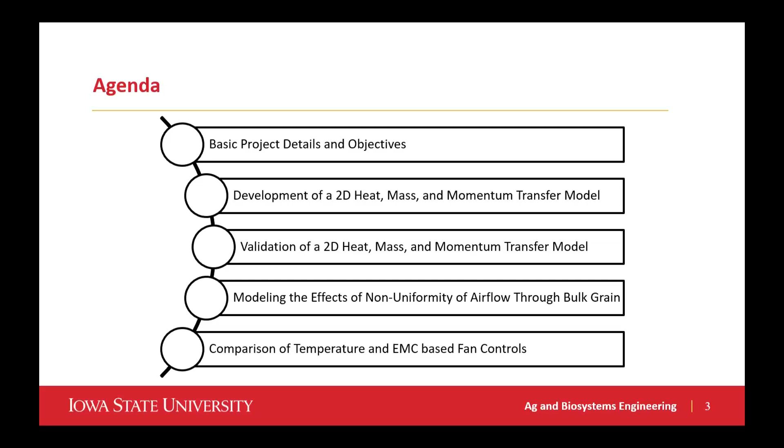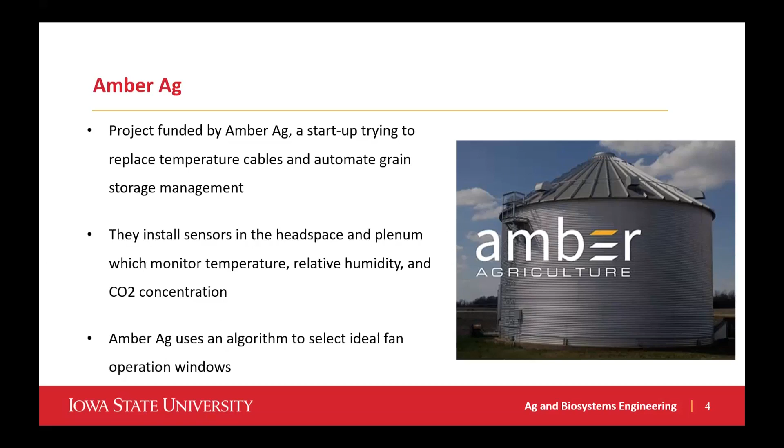My project is funded primarily by a company called Amber Ag. Amber Ag is a startup trying to replace temperature cables and automate grain storage management. Instead of temperature cables, they have a more simplified system with a sensor in the headspace and in the plenum. These sensors monitor the temperature, relative humidity, and carbon dioxide in those two spaces. They also have a fan controller as part of their system so they can look at weather patterns and predict the best aeration windows, allowing more automation and control over fan and aeration practices.

The objectives I had for helping their system out with my work were, first, to develop and validate a grain storage ecosystem model. Since they don't have cables directly sensing the grain, that's where the model comes in to predictively monitor the temperature and relative humidity. I also wanted to begin integrating the model into the Amber Ag system for predictive grain monitoring and automatic grain aeration management, helping improve the way they select windows and adding modeling to their technology repertoire. Lastly, I evaluated the effects of non-uniformity of grain mass on the non-uniformity of aeration, cooling, and conditioning.

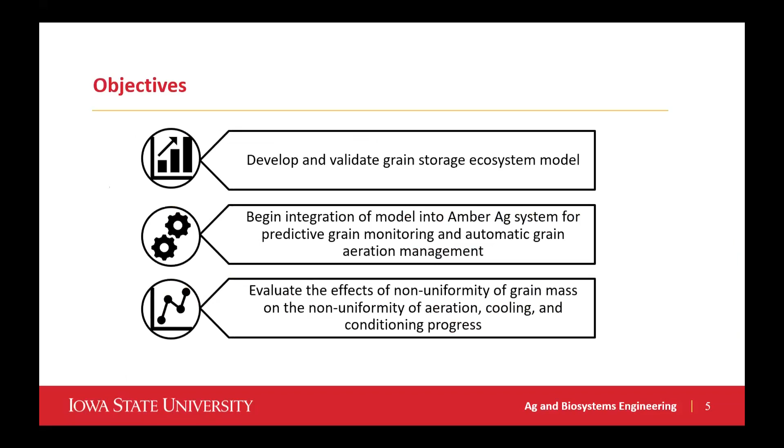Without temperature cables, they don't have direct sensing, so we need a model that allows us to predict the grain temperature based on recorded weather data and all of the bin parameters. We can run the model with that data and get an estimate of the grain temperature distribution and the grain moisture content distribution. The other big function temperature cables serve is detecting hotspots caused by biological activity that can cause grain deterioration. This activity causes an increase in heat, detected by the cables, and also produces carbon dioxide. So the Amber Ag system, without directly sensing hotspots in temperature, directly senses the carbon dioxide increase. The model will then be used in finding aeration windows and further study of grain management practices.

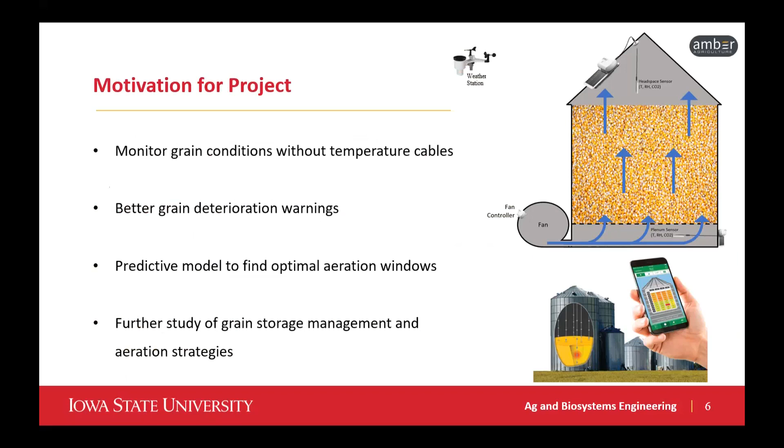Next, I'll talk about the development of the model. Without going into too much detail on the equations, in the grain mass we account for heat, mass, and momentum transfer. It's important to account for heat and moisture transfer so we know the temperature and moisture content of the grain, and the momentum transfer accounts for natural convection. The Khankari equations were used here for two main reasons: the temperature equation accounts for latent heat, which is important so it's coupled with the moisture equation, and likewise the moisture equation is coupled with the temperature equation, with parameters where diffusivity is based off derivatives of the EMC curve. So it takes the EMC curve into account when accounting for the equilibrium between the air and the grain.

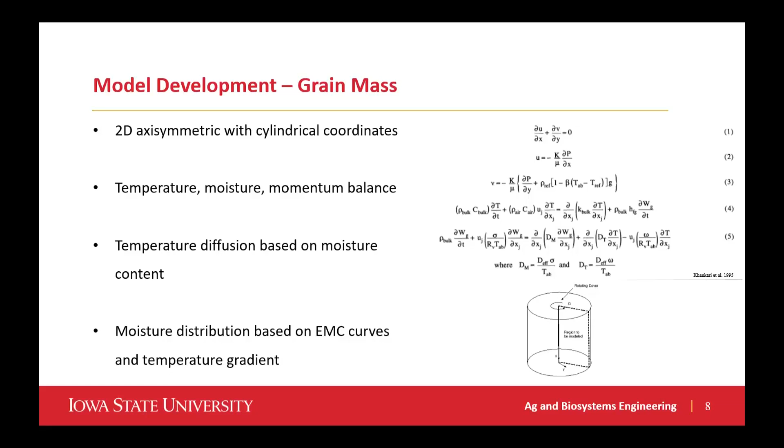The boundary conditions are prescribed as systems of ordinary differential equations, essentially energy and mass balances on these boundary conditions, which account for heat loss to the grain, heat absorbed from solar radiation, and heat gained or lost due to forced convection from the wind. So all of these things are accounted for in the boundary conditions.

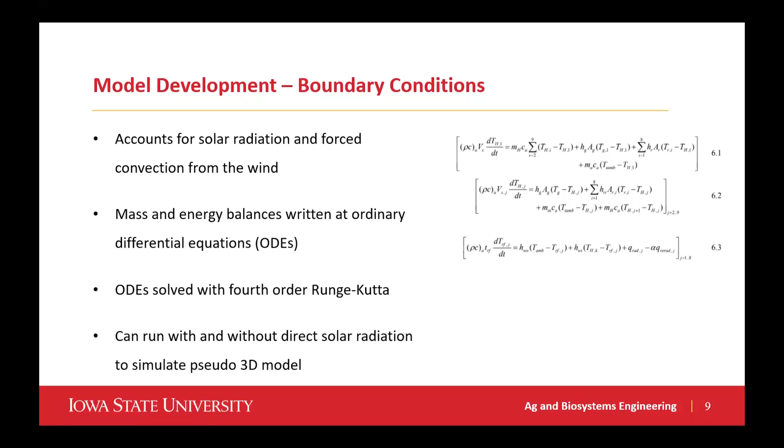Additionally, the way we account for solar radiation allows us to mimic the effects of a north versus south side, where you would receive or not receive direct solar radiation. So while being a 2D model, this allows us to have some investigation into those 3D effects.

The aeration model was based off of an existing model in Python, based on previous PHAST models which have been well documented and well used. It's based on the Thompson equilibrium model, a widely used model that has been used and validated many times before.

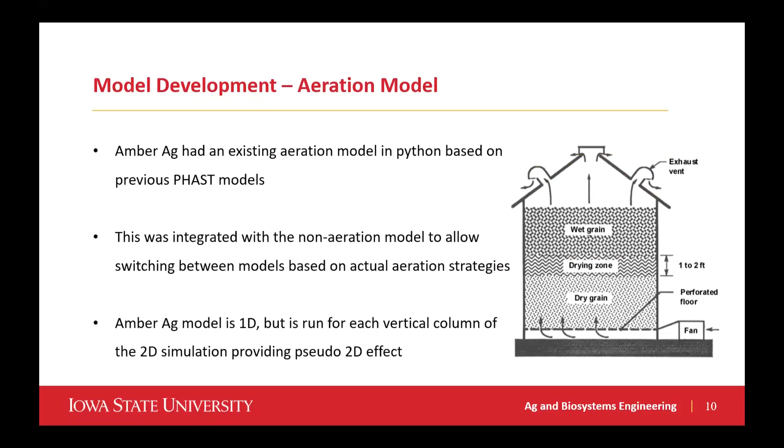The numerical methods of this model are very different from the model most recently done by a previous grad student of Dr. Myers, Dr. John Lawrence. His model was very complicated and took a lot of time to run. Some of these simulations took several hours to run, and we wanted to narrow that down to running in a few minutes. That's one of the main reasons it's two-dimensional.

It uses an explicit method, with larger mesh sizes. Additionally, it was being done in Python, which is just inherently less efficient than Fortran, which the previous model was coded in.

But because we have simplified the methods and used more efficient computational methods, it means it's a much more user-friendly model with much easier access. So it's more accessible to people, and more people can make use of this model because it runs more quickly and doesn't take as much background coding to utilize.

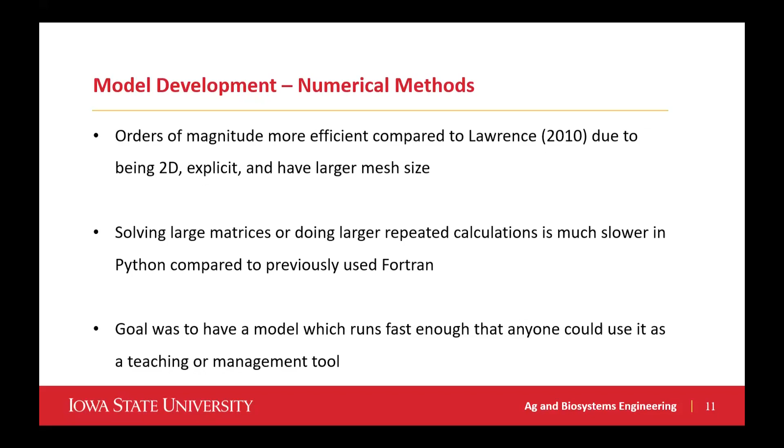So after the model was developed, the next big step is, of course, to validate the model so that we can trust the results.

Model validation for the headspace and plenum was done with recorded data from the Amber Ag sensors. Like I mentioned, the Amber Ag sensors are installed into the headspace and plenum of bins. These bins were at the ISU research farm, and we were able to compare our model data with these recorded data points from Amber Ag.

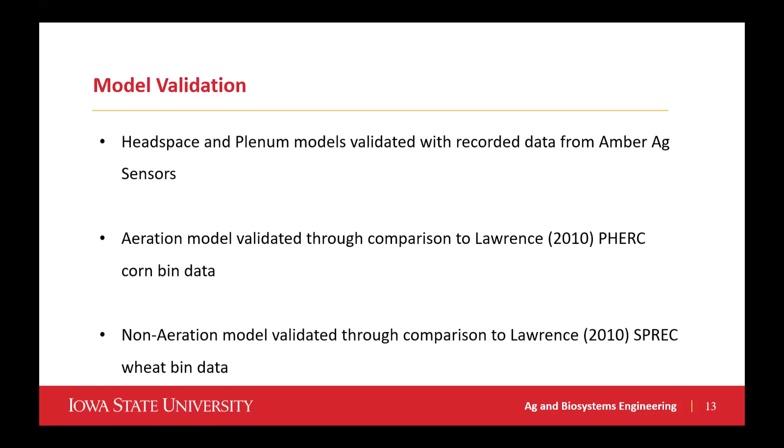The aeration model was validated through comparison to the Lawrence dissertation, and the non-aeration model was also validated through comparison to the Lawrence dissertation.

This is the graph for the headspace model. As you can see, we have pretty good agreement following the daily trends of heating and cooling throughout the day. There are a few spots, especially in the early portion, where we're over-predicting the temperature right at the peak, due to over-prediction of the effects of solar radiation and maybe under-prediction of the effects of forced convection, which would bring that down.

But every nighttime temperature is very accurate when there's less solar radiation. So when you average everything out, the standard error ends up at 6.4 degrees, but the rolling average error is only 0.72. These daytime highs really are exaggerating why this standard error is so high, but the rolling error, the average error over the whole period, is pretty good. That's what's most important for the diffusion of heat into the grain mass. Daily temperature spikes are not going to have a huge impact on the overall accuracy as that diffuses in, which is why I've also included the average error.

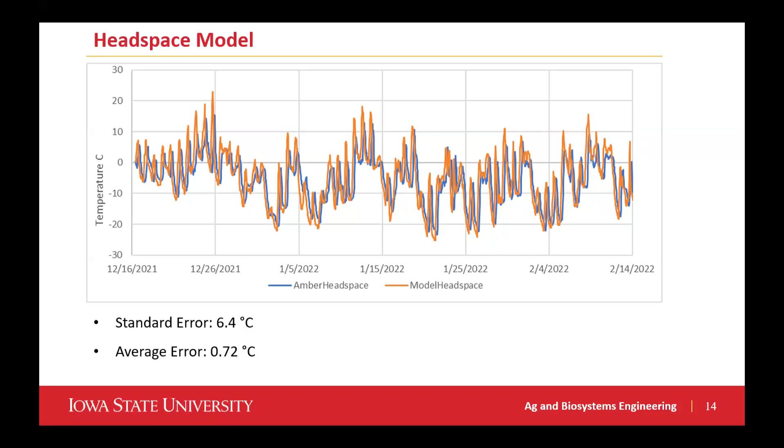The same is true for the plenum model, where we have some under-predictions at the start of the run, causing a standard error of 6.7, but an average error of negative 1.9 degrees.

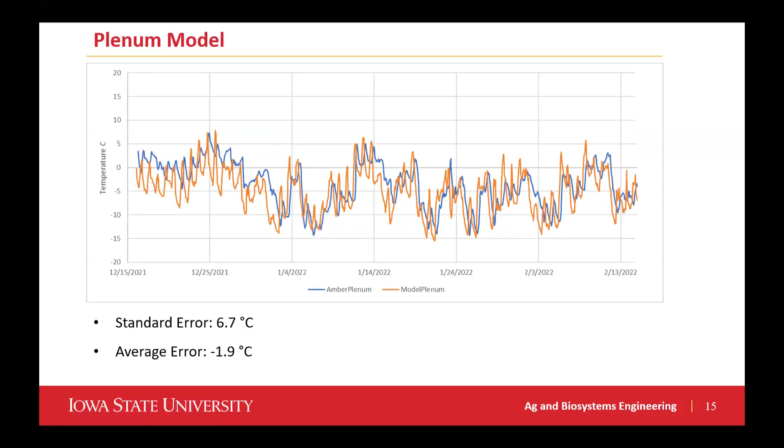Next, we look at the aeration model. Here we have our model overlaid over the results from the Lawrence dissertation.

Our model is this orange line, the current model. The blue line is the Lawrence model, and the red line is the recorded data from the Lawrence dissertation. This looks at the center cable for a bin, and we have the bottom node, the middle node, and the top node of that cable.

At the bottom node, we have around 0 to 2 degrees Celsius error throughout the entire run. The main areas where it deviates are in the afternoon of the 11th and the 13th. I thought it was interesting that's also where the Lawrence data overpredicts by more, but at the same time, I thought that could point toward a difference in the recorded weather data and the actual local data experienced, because we can only be as accurate as our weather file, which is usually recorded from a nearby weather station.

But overall, the aeration front is well tracked, and we capture the movement of cooling and then rewarming. This pattern is generally pretty well captured.

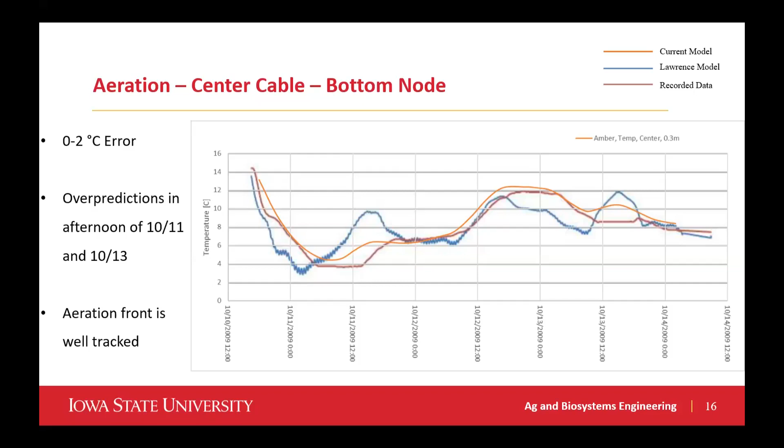Lastly, in the top node, we see that the error over-predicting at the front has increased. The angle is less steep and the movement is just delayed. It's lagging behind, or a little over dampened. This could point to differences in the actual airflow rate and the calculated airflow rate based on the bin dimensions and fan specs.

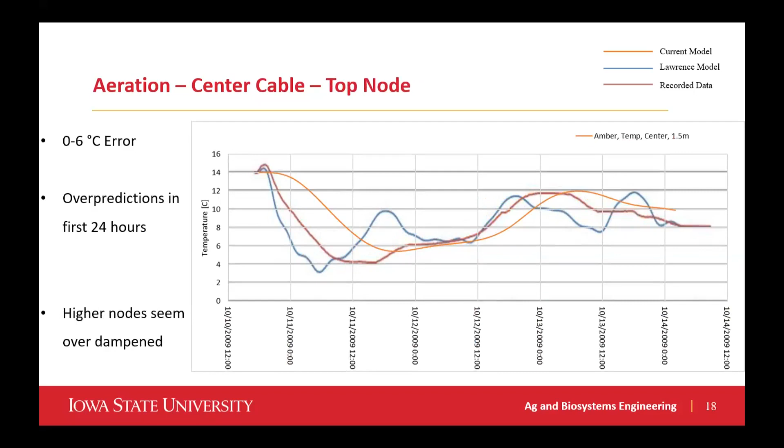One thing that's important here is that we see this wave, this dampening effect. When we look from the bottom node to the middle node to the top node, you can see the waves sort of stretch out, delaying those effects. That's something we see in aeration in both the recorded data and in our model.

So looking at aeration, the center cable shows pretty good agreement between model and recorded data. We can see the wave dampening shape and behavior of the model throughout this cable and what we've looked at. And we know that airflow is definitely a key parameter in modeling aeration.

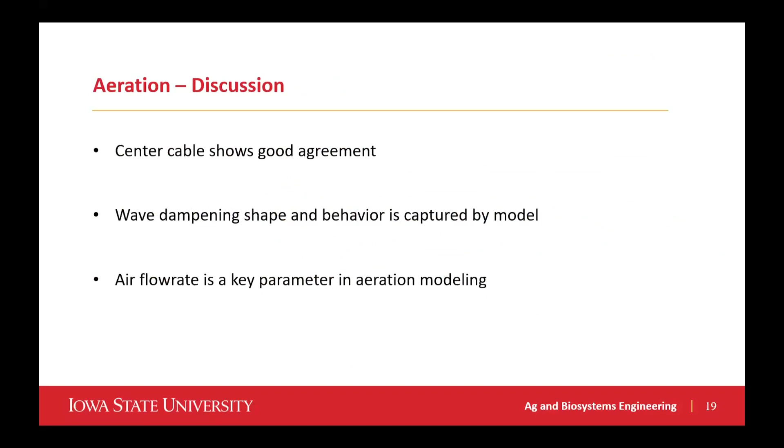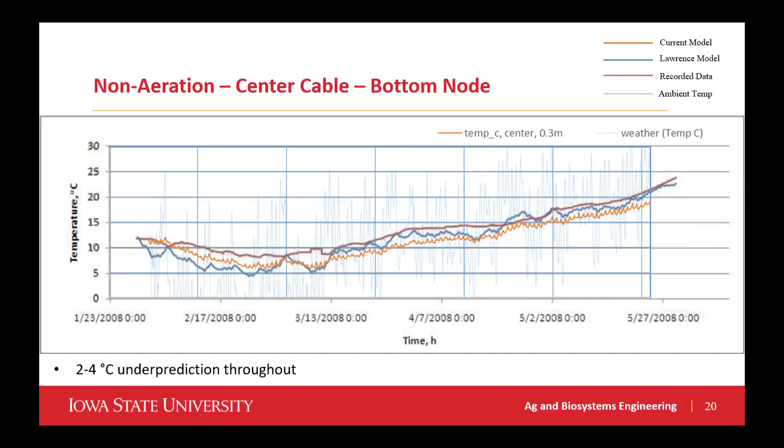Here in the bottom node, we have a 2 to 4 degrees Celsius prediction error pretty much throughout the entirety of the run. Obviously, we start at the correct conditions because that's the input, and then it's generally under-predicting by about 2 to 4 degrees throughout the duration of the run.

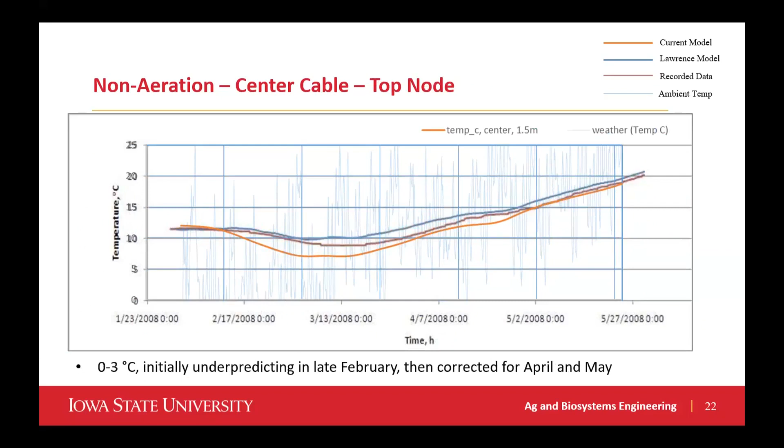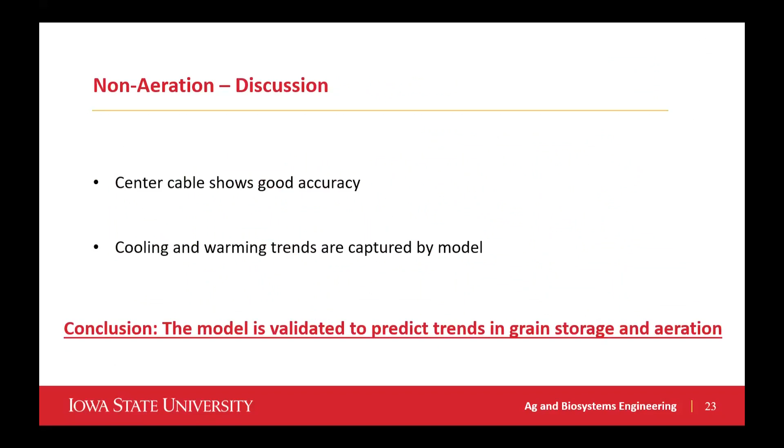Overall, for the non-aeration case, the cable shows pretty good accuracy, and we're capturing those cooling and warming trends that would be expected over a storage period during these kinds of conditions.

The next thing I looked at was the effects of non-uniform airflow through bulk grain mass. In addition to working with Amber Ag, I also worked with another company called Grain Weevil, and they developed the Grain Weevil robot. This robot allows you to avoid entering dangerous grain bins. It can break up crusting or level grain without a human actually entering the bin, which increases the safety factor.

My work was focused on proving the potential effects of the Grain Weevil. In having even airflow, there are two main problems that we tackle.

When grain is just poured into the grain bin, we have a peaked grain mass based on the angle of repose, and there can be a concentration of fine matter, which decreases the porosity and increases the resistance to airflow. Both of these things slow down aeration progress in the center of the bin, which is inefficient and leads to excess run hours.

What the grain weevil robot claims to do is you could add it after filling a bin to spread out the grain mass. This wouldn't affect the concentration of fines, but it would remove the peak without a person having to enter the bin. It could also be added with the grain mass to spread out every load added to a grain bin. If it can keep up with the rate that the load is being added, you could spread out the fines and also end with a level surface.

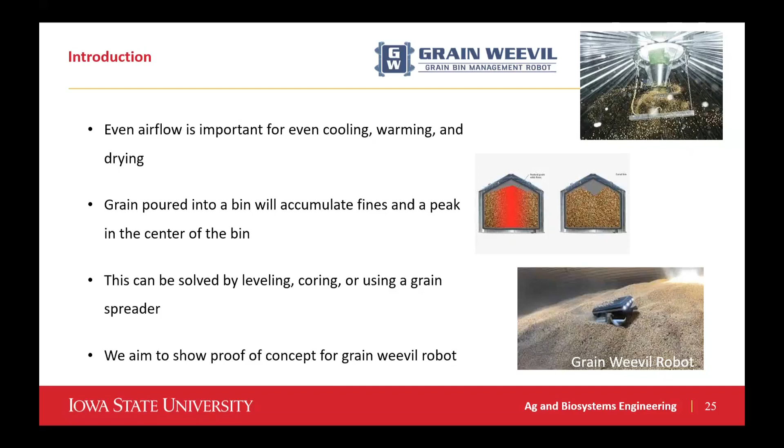So to model this, we used ANSYS Fluent, a commercial CFD software.

We had our different scenarios: regular peaked grain, leveled grain, which is the grain weevil being added after filling, just leveling it without changing the distribution of fine matter, and a partial spreading scenario, which would assume the grain weevil has been added before filling and has spread out every load as it's been entered.

So it's a leveled surface and also a partially spread out concentration of fine matter—less concentrated in the center and more evenly spread. And then just some ideal grain spreader that we're going to assume perfectly spreads out everything evenly, mostly as a sanity check. This geometry and porosity values were entered into the ANSYS Fluent model.

We ran the Fluent model. That gives us a velocity profile, the velocity at each portion of the grain mass. We were able to analyze the velocity profile and turn that into a non-uniformity factor, which I'll discuss in more detail in a few slides. That non-uniformity factor becomes a parameter in our aeration model to vary the airflow rate from the center to the side.

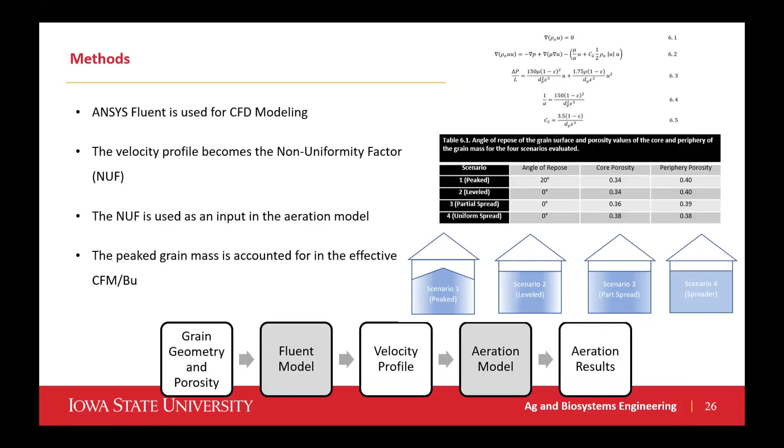Having that parameter added to our aeration model means we can show aeration results and really get some quantifiable real-world or simulated examples to show the effectiveness and potential benefits of the grain weevil.

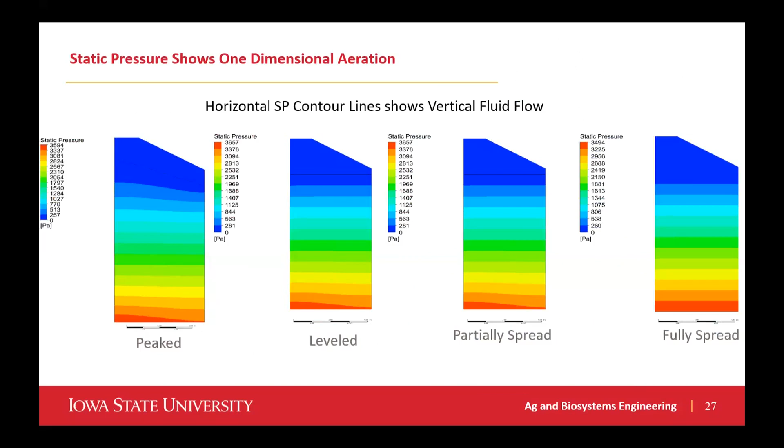In addition to the velocity profile, we also generated static pressure to show the fluid flow movement. Fluid flows from an area of high pressure to an area of low pressure. These predominantly horizontal static pressure lines mean there's predominantly vertical fluid flow, mostly one-dimensional outside of a couple areas with slight non-one-dimensionality, but in general it's very one-dimensional airflow, which is an important assumption for our aeration model.

Looking first at the peaked grain results, the first thing we notice is these extreme values—extremely low values towards the peak and extremely high values towards the edge of the grain mass. The center of the bin is on this side, the wall of the bin is here, and this is the plenum and the surface of the grain mass.

When we take all of these velocity values and plot them, with the center here going out to the radius, the blue nodes show every value of velocity. You can see the extremely low values here and the extremely high values shown here. The orange is the vertical average—the average in that vertical grain column. We notice that the average still becomes fairly linear.

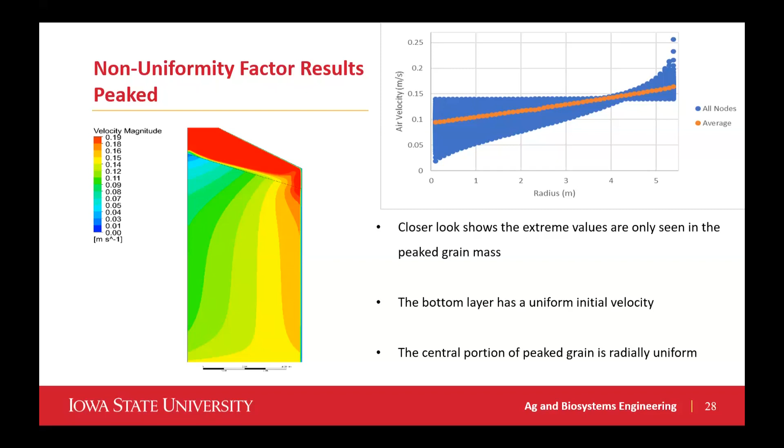That makes it a lot easier to account for in our model with a single value of the non-uniformity factor. Outside of that top layer, we see a pretty even radial distribution, fairly consistent vertically in the middle, starting off at a pretty uniform velocity.

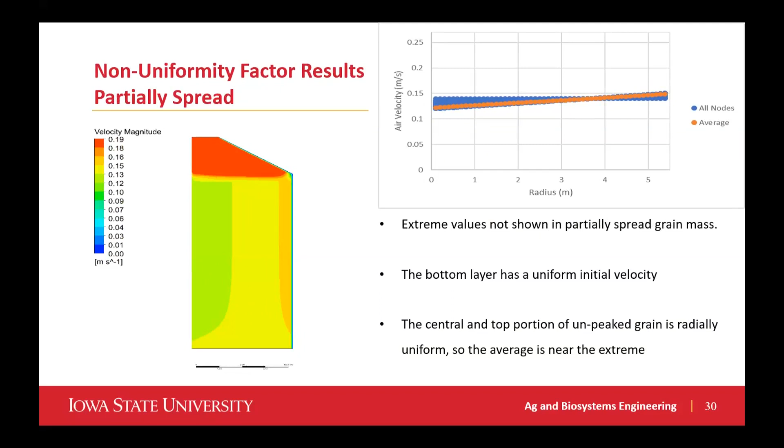So these were all shown for a 36-foot by 36-foot bin with 1 CFM per bushel. We also simulated a 90-foot bin with 1/10 of a CFM per bushel, and we had the exact same trends between the peaked, leveled, and partially spread grain masses.

So the big takeaways from the CFD simulations: the static pressure shows predominantly one-dimensional fluid flow. The main extreme values are isolated in the peak of the grain mass in that top layer. Other than that, velocity starts out uniform and then moves to a radial distribution, which predominantly predicts the average velocity throughout that grain column.

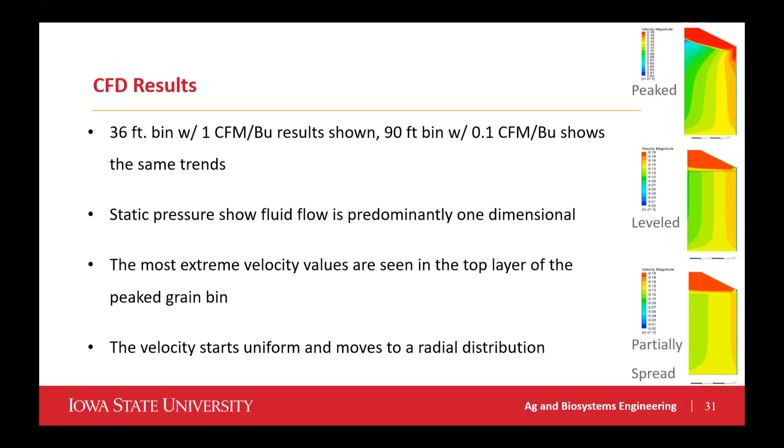This average velocity is what was used for our non-uniformity factor, which is essentially the difference between the center and the side as a percentage of the average airflow rate. So these are all in percentages.

We can see that the 90-foot bins had slightly higher non-uniformity factors, and that leveling the peaked grain mass would result in a decrease in non-uniformity. Partially spreading the fines in a leveled or peaked grain mass would also decrease the non-uniformity. So both of those cases of the grain weevil's potential use have lower non-uniformity than the peaked default case.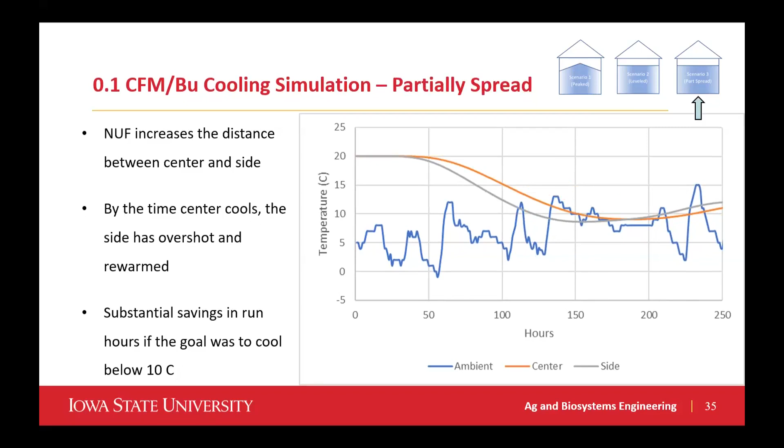Because you're waiting for this slower center to move in the peaked grain mass, it's overall less efficient because you've already completed your objective in the side and you're just waiting on the center to complete. So when they're more uniform, it's more efficient because the center and side move much closer together.

I also did a simulation for drying in this case. We see much the same results here when we're drying. So here we see the peaked, the leveled, and the partially spread cases.

This is looking at the average moisture content of the center grain column and the average moisture content of the side grain column. We see that the non-uniformity factor has a huge impact on how close these lines are, and how similar it is if you were monitoring your center or your side, how far apart they are.

Additionally, like the cooling case, there's potential for fan run hour savings. If, for example, 15.5 was your target, we have that being reached at around 1,300 hours, because it doesn't matter when your side gets completed.

We have to wait till the center has dried. So that happens at around 1,300 hours, but by then we've shrunk our side by quite a bit. In the leveled grain mass...

We achieve our drying goal in the center at around 1,100 hours, and we've shrunk by a little bit less. In the partially spread case, we've achieved our goal at around 1,000 hours and shrunk by even less. So again, having a more uniform grain mass allows us to achieve all of these objectives more efficiently because we're not waiting on that slower moving center.

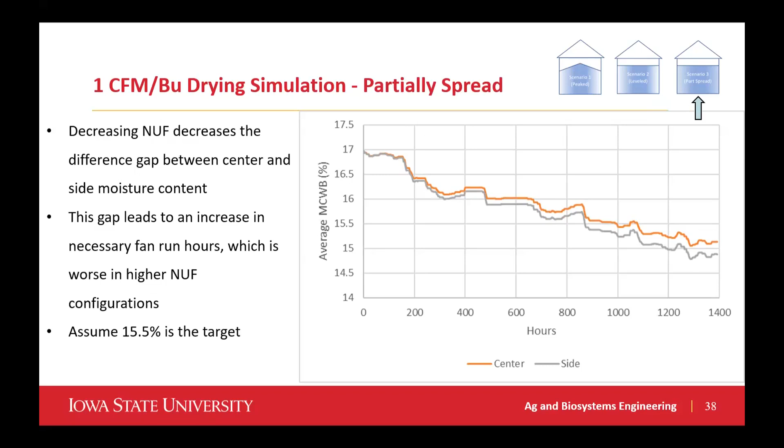So in conclusion, when we're looking at this, we know that the leveling of the peaked grain mass or the partial spreading of fines and leveling of a peaked grain mass both decreases the non-uniformity in large and small bins. Decreasing this non-uniformity can save run hours and increase the efficiency for cooling and drying. And because of that, that means that the grain weevil robot does have the potential to save farmers money by improving the uniformity of aeration during cooling and drying.

And so these results we gave to grain weevil so that they could apply for phase 2 funding, and had a pretty good proof of concept showing the potential there.

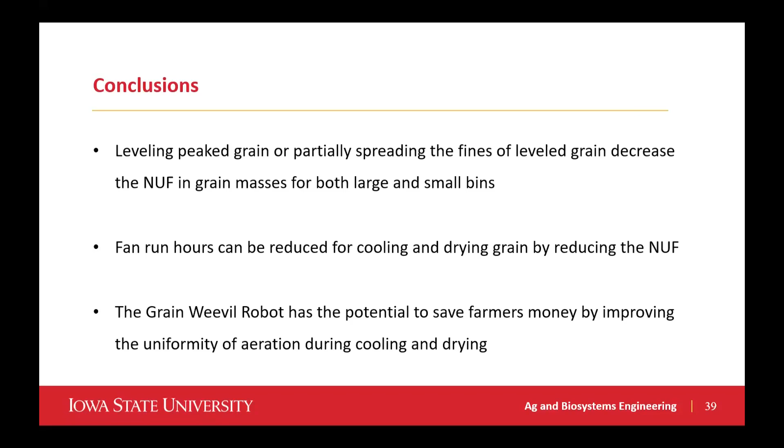Next, I looked at comparing temperature-based and EMC-based fan controls. This chapter really looked at how can we utilize the model to improve grain storage management. So here we're looking at a very simple case.

We want to cool our grain down before we store it to prevent grain deterioration. However, we know that if we're cooling grain only accounting for turning on the fan when the temperature is cold, then we're at risk of overwetting or shrinking the bottom layer if we're not accounting for the equilibrium moisture content and the humidity of the air that we have when we select our aeration windows.

And so modeling allows us to very quickly look at a couple different examples of fan controllers and also predictively monitor based on forecasts what might happen based on different fan controls.

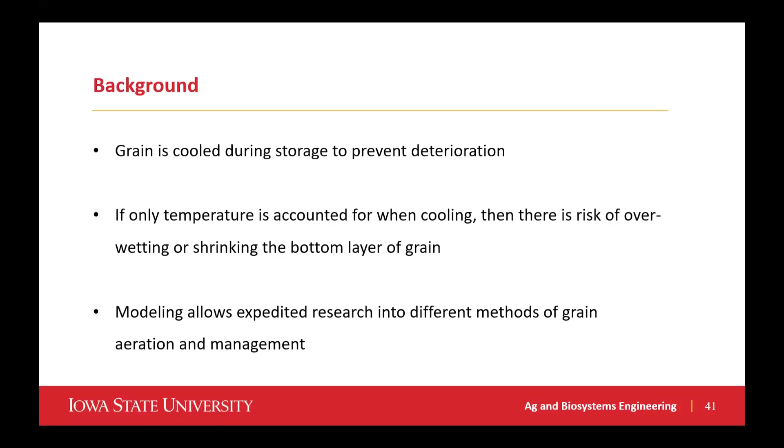So here we're assuming we have a 1 CFM per bushel bin. The bin starts at 20 degrees Celsius and 15% moisture content. And we are assuming the fan controller at midnight every day looks at the next 24 hours, uses some logic controls to select valid aeration windows.

For the next 24 hours, it runs those windows. And then at the end of those 24 hours, it checks, have I accomplished my goal? In this case, the cooling goal is to cool to an average grain temperature below 5 degrees Celsius.

So for the temperature-based controls, we're only looking at temperature. We're just going to say turn the fan on whenever the ambient temperature is at or below 5 degrees. For the EMC-based controls, we also want the temperature to be at or below 5 degrees Celsius, but we also add the stipulation that we want the EMC based on the ambient temperature and relative humidity to also be below 20%.

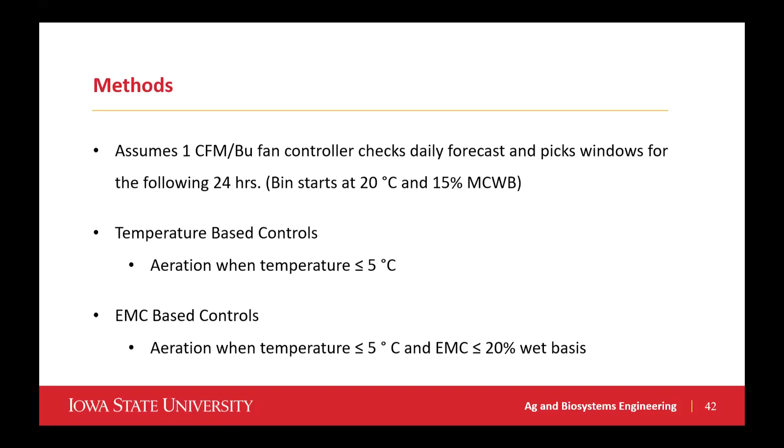So looking at the temperature-based controls, after day 1, 11 hours get selected. Our average temperature has lowered to 9.4 degrees Celsius. However, the bottom layer, the bottom 1 meter of the bin, is now at an average moisture content of 15.5. So it's overwetted by 0.5%.

By day 2, 27 total hours have been selected for the temperature-based controls. We've almost achieved our target. The average temperature is now 5.7 degrees Celsius, but the bottom layer has increased to 16.5% moisture content for the average of that 1 meter bottom layer of this bin.

And finally, on day 3, the simulation has completed after a total of 38 fan run hours over that 3-day period. It cools the bin to 4.3 degrees Celsius, so we've achieved our cooling objective. However, without looking at the EMC for our fan run windows, we've selected some fairly humid air and end up with a bottom 1 meter that has an average moisture content of 16.9 and goes up to 17.2.

So this being well above the safe storage moisture content for corn would have some big concerns if we were cooling for storage. If we leave the corn for storage at this moisture content, we're definitely putting ourselves at risk of molds or other biological activity.

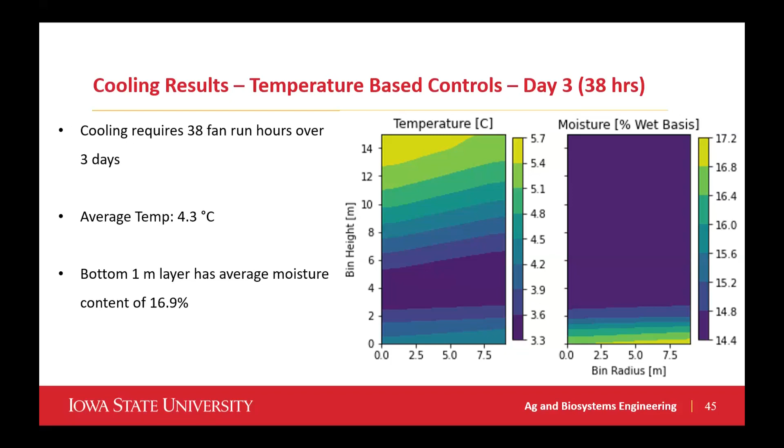Next, we look at the EMC-based controller. So here by day 3, we've only selected 4 hours because it's much more selective on which windows it will approve for aeration. So in those 4 hours, we haven't achieved much cooling.

We've only gotten down to an average of 14.8, and the top of the grain mass still just remains at 20 degrees. However, our bottom layer has not overwetted. It's actually shrunk just a little bit to 14.8%, which is expected when we're cooling grain to shrink slightly.

By day 8, 10 total hours have been selected by the EMC-based controller. We've lowered our temperature to 9 degrees Celsius, and the bottom layer is actually right at the starting point of 15% moisture content.

By day 11, 18 hours have been selected. The average temperature is at 5.7 degrees Celsius, and the bottom 1 meter layer has overwetted just slightly to 15.1% moisture content. After a total of 12 days and 34 hours of aeration, the average temperature is down to 3 degrees Celsius, and the bottom 1 meter layer is now at 14.9% moisture content.

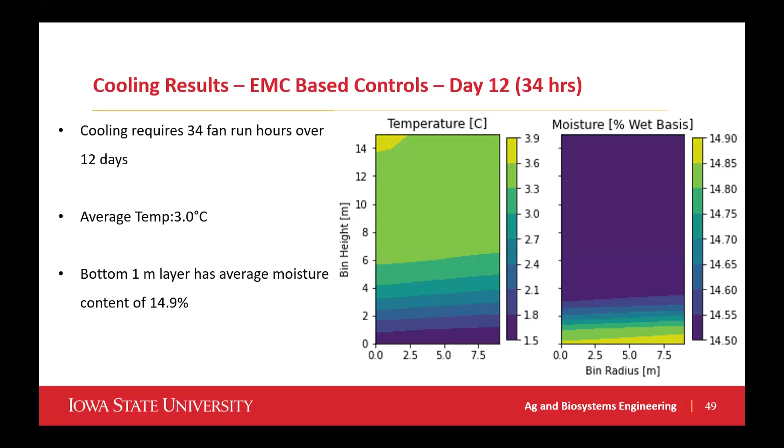When we compare the two final outcomes, the temperature-based controller completed in 3 days and 38 hours, while the EMC-based controller completed in 12 days and 34 hours. They both achieved the cooling objective, though the EMC-based controller does achieve slightly more cooling with slightly fewer hours.

Where the real difference presents itself is in the moisture content at the bottom layer. The bottom layer moisture content in the temperature-based controller is at 16.9%, while the bottom layer of the EMC-based controller is at 14.9%. That's a 2% difference, and would be cause for concern in the temperature-based bin, but would not be a cause for concern in the EMC-based bin.

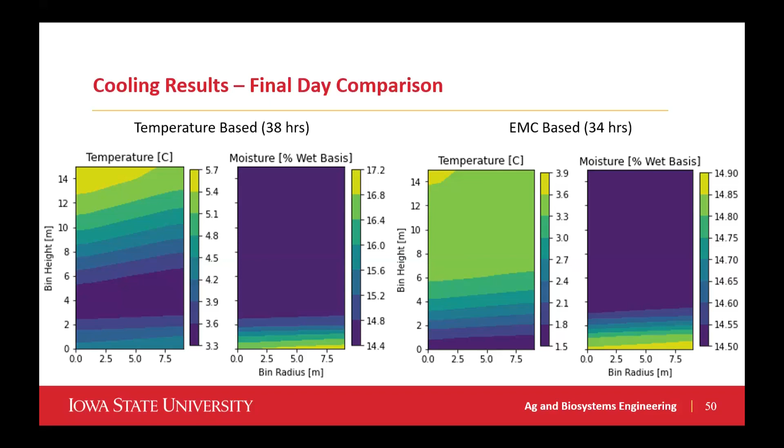So the conclusions are that EMC-based fan control can achieve the same or better cooling without substantial impact on moisture content. We also found that EMC controllers are more selective, which will result in more days being required to find suitable fan run hours.

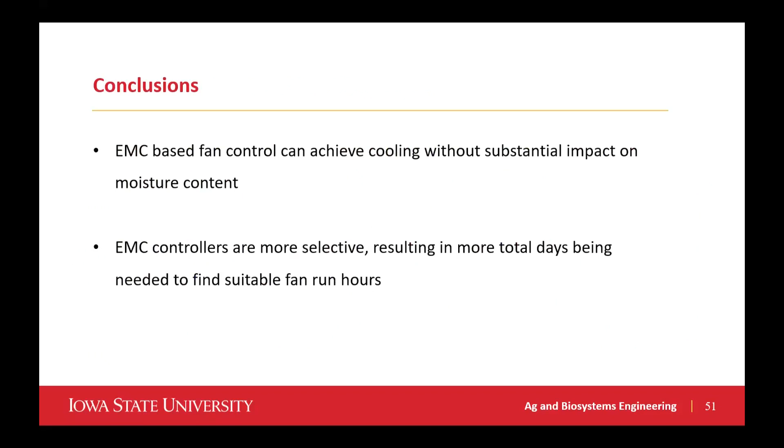So that concludes the chapters that I've done, but of course we have lots of ideas for how this model will continue to be used and help us in research and with Amber Ag.

First, I made this model for Amber Ag through their funding, so of course Amber Ag is going to continue to utilize the model. They'll use it to replace temperature cables so that users can understand the temperature and moisture content in their bins, and understand how much aeration, drying, warming, or reconditioning progress they've made. They'll also use the model to continue investigating how to best select aeration windows, and use it to add features for their users.

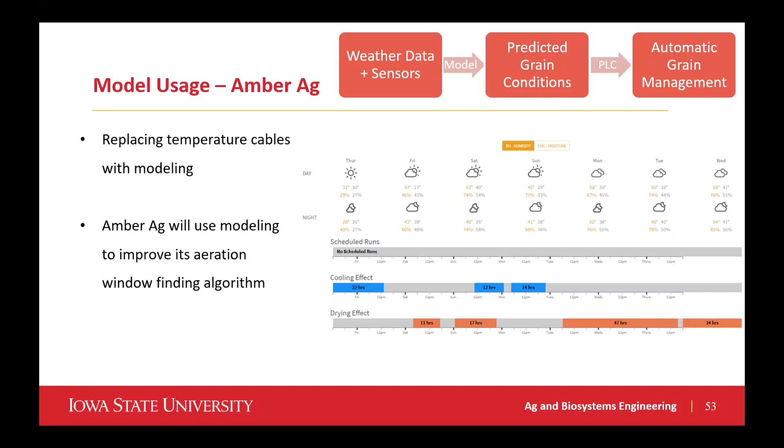Of course, ISU will continue to utilize this model, especially at the ISU Kent Corporation Feed Mill and Grain Science Complex. All of these bins will be equipped with both the Amber Ag system and the AGI SureTrack system, with sensors in the headspace and plenum, and cables in the grain mass for temperature and moisture. We'll be able to continue generating a lot of data for different larger bin sizes, different grain types, and how well the fan is sealed, giving a lot more comparison and validation of the model.

And then, of course, we'll continue to use the model for studying grain storage management and grain storage management strategies.

Lastly, I see the model as a very good teaching tool because it uses totally different numerical methods than some of the previous models, which makes it a lot more user-friendly. Really, all we have to change for a user are five files, which are just text files you can edit in any text editor. You put them into the right folder, hit run, and the model gives you your results. So it's very easy to use even without a strong background in modeling or coding.

Additionally, because it runs very quickly, it's something that Amber Ag will eventually house on their servers as a browser-based tool that likely runs a simplified version of the model. Maybe you can add in your location, bin diameter or dimensions, grain type, and then run some simplified version of the model.